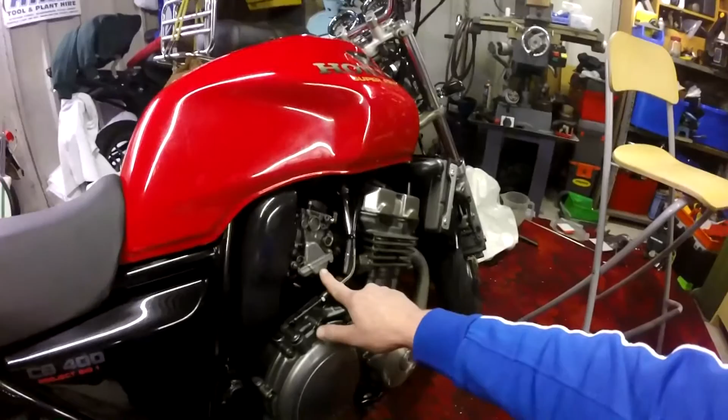Now the first quick fix we can do is as simple as banging on the carburetor. Now what happens is you've got rust and dirt in the fuel, rust from the inside of the tank. It's gone through the fuel line into the fuel bowl and it's got lodged between the shut-off valve and its seat.

Now with the fuel turned off, with something as simple as a plastic or a wooden screwdriver, you can hit the fuel bowl area like that. Nothing harder, and certainly not use a hammer. And sometimes that's enough just to dislodge that bit of grit to make it go through the system, and the shut-off valve will seat and stop any further leaks.

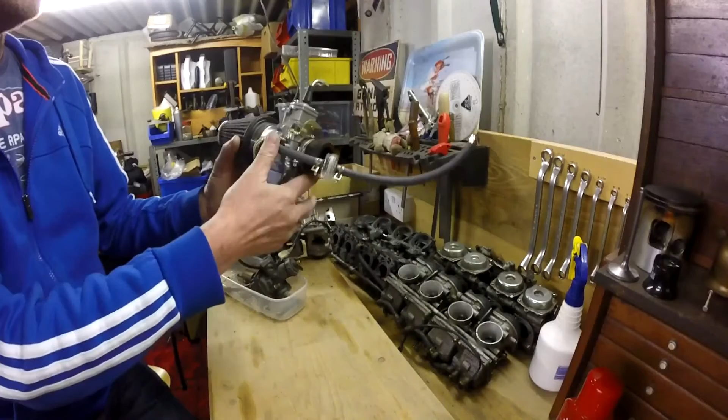So this is a carburetor off a single cylinder engine. Let's just take this off a minute. So we check it visually all around. Is it cracked, broken, any damage? Is everything working as it should do? We check the fuel lines. Are they in good condition? Are they split, perished? Same with the fuel filter, which you should always have.

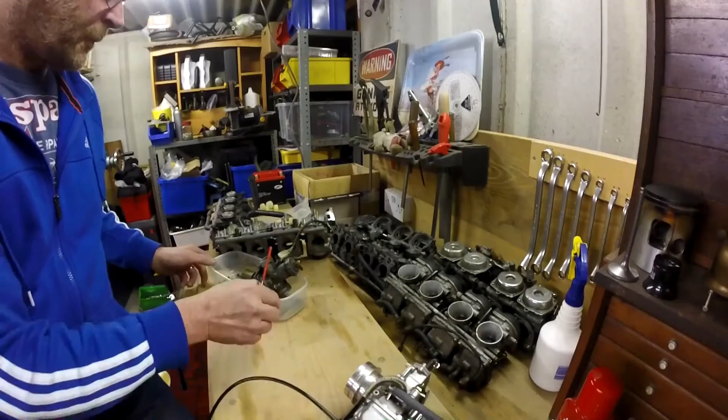Is the float bowl good and tight? The jet retainer, is that tight? Is this gasket for the float bowl in good condition? So then we look inside. Got another carburetor here for that. So we take the float bowl off. There's a gasket that needs to be checked.

Now, one of the main causes for leaking is these floats inside the bowl. Now, has it been punctured? Is it sticking? Does it move freely? And the way it works is like that. Obviously the bowl comes off.

So fuel comes in this line here, comes down here and fills this chamber, and would normally get sucked up the jets, etc. But this is the way in. That comes through this float valve here, and as these floats go up and down with the amount of fuel in, when they reach a certain height, the valve in there is supposed to shut off the fuel. Now that's the main place where dirt and debris get trapped, and that causes a leak.

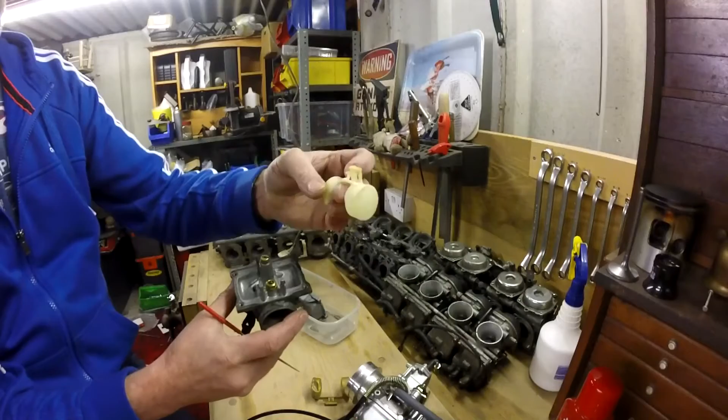Or these floats have been punctured or got a hole in, let fuel inside there, so they give a wrong reading, so they go to the wrong height, which doesn't shut off the fuel. So inside there we take the pin out. The floats are either brass or sometimes plastic, and even the plastic ones can get a hole in. So this float going up or down is what shuts off the fuel.

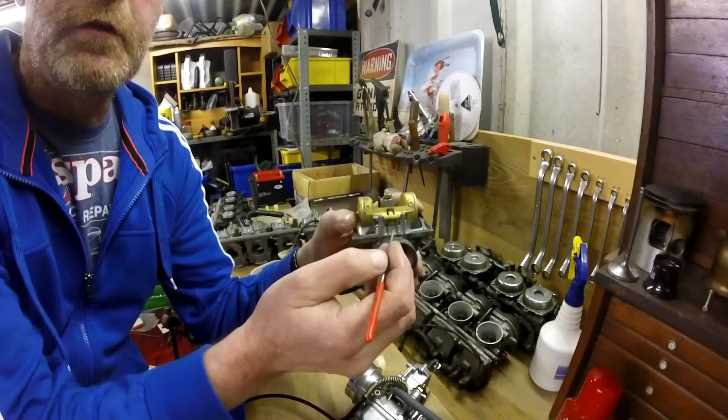Now if I take away the float, the fuel valve consists of two parts. Now most carburettors you can unscrew the whole assembly like that. And what it consists of is a plain bore brass plug with a smaller hole in the bottom, and a plunger that's got usually 4 sides relieved for the fuel to go past.

But its main function is this cone on the end. Now when that's pressed down by the float, there's a little spring loaded plunger there. But when the tab on the float presses it down, that's enough to shut off that valve and stop the fuel passing through this little hole.

Now sometimes the little tab on the float is what's the problem. Now this one isn't bendable, so you can't adjust those, not without heating it up and forcing it in some way. But a lot of them have a little tab, and the idea is that with a pair of pliers you can gently tweak that little brass tab so that when those floats go up and down, it shuts off the fuel.

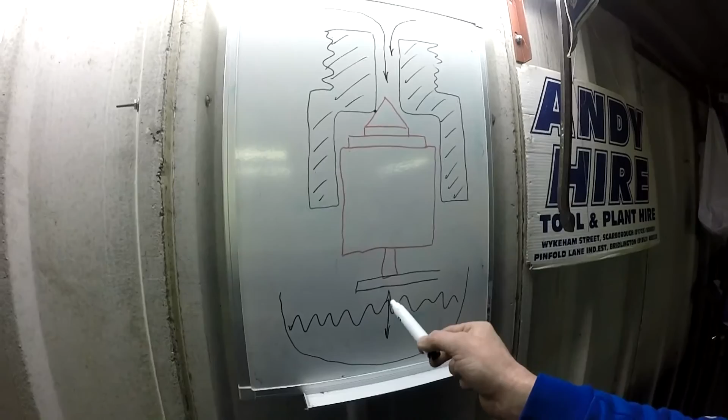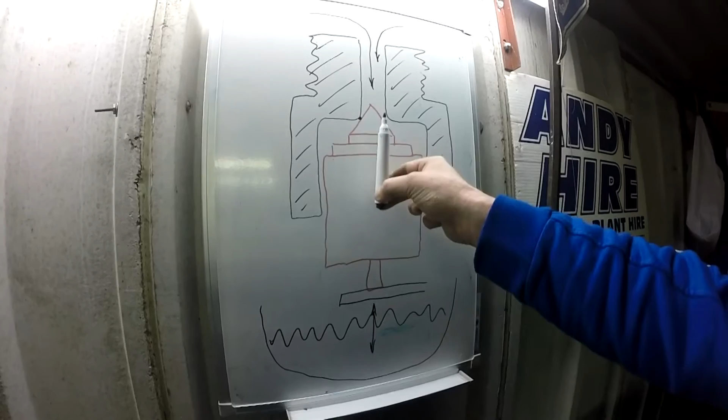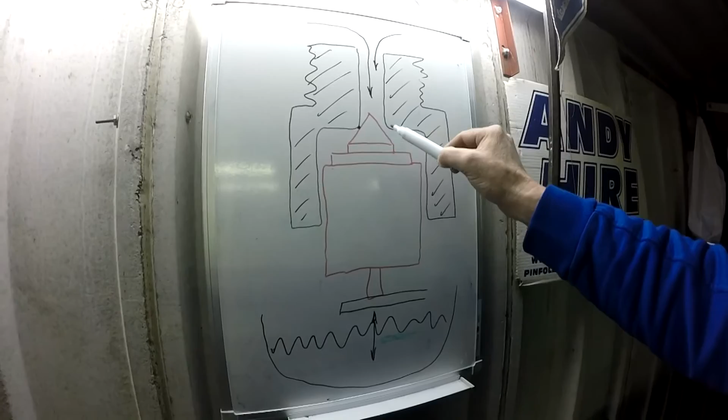So this is a quick doodle of what the valve looks like. This is the brass valve here, this is the plunger with the cone, there's your tab pressing the plunger up and down, this is your float bowl, there's the fuel. So as the fuel goes up, it pushes the plunger up. Now if there's a piece of debris, grit, whatever, this cone won't block off this aperture here, and the fuel will just constantly run.

Another important component to check is the top diaphragm, if they're CV carburettors, because they're reliant on a vacuum being created in the top chamber. So you have to check that this diaphragm has got no splits or tears in it.

Now you can just gently ease it away from the slide. Don't be yanking at it, you know, it's not your wife's knicker gusset. Just enough to make sure that it's not got a rip in it. See, this one has got a rip. I don't know whether you can see that, and that ain't gonna work.

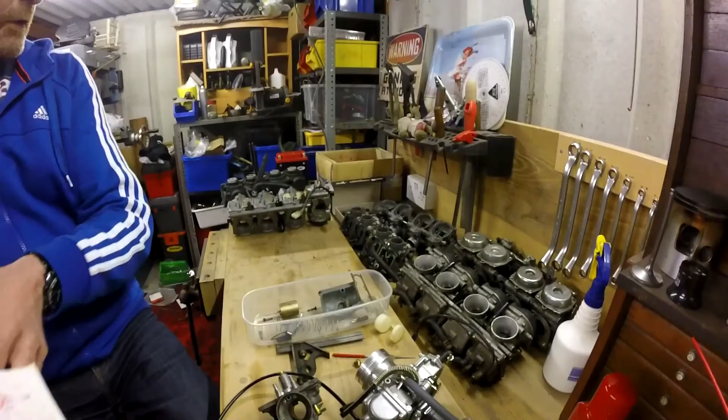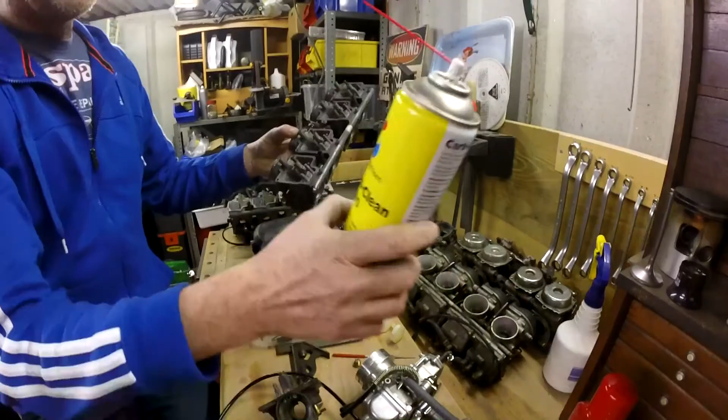Right, so getting back to the problem I had with my carburettors, I cleaned my carbs with the likes of carburettor cleaner, you know, and all the jets, ports, etc. Blew them all out with an airline. Replaced all the seals and gaskets. I even invested in an ultrasonic cleaning tank. It's only cheap and nasty from Aldi or Lidl.

It's supposed to be for your jewellery or your spectacles, but I put all my carburettor parts, jets, valves, needles, etc. in there. Bit of cleaning solution. Switch it on, let it buzz away for 5 minutes. Does the job, great. So yeah, I did all that, put the carbs back together very carefully, put them back on the bike, and the bloody fuel leaked again.

Took them all off, took it apart, cleaned it, put it back, and it still leaked. So again, I took it all apart and investigated each carburettor individually, and it turned out number one was leaking, and it turned out to be this little float valve.

So I only discovered that this valve was leaking because I used a jeweller's loupe, jeweller's eyeglass, some extra light, and looked at every single part, and I noticed that one of the valves had marks on it, as though someone had put a piece of wire or a needle or something down this valve, and he must have scratched it or marked it.

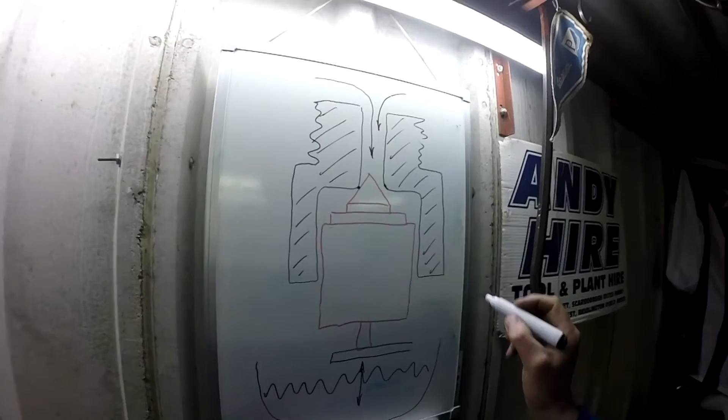And it turns out that this little plunger wasn't sealing the valve, and it was leaking past on the scratch. It was the tiniest of scratches, but it was enough to make the fuel leak. So this scratch was on the corner of this hole here, and it was stopping this cone from sealing.

So the problem I had with my carburettors was the fact that the valve seat on this bank of carburettors is pressed in. They're not removable. Well, you can, but you can't buy the replacement part. So I needed to recut the seat for this tiny little valve in situ, because I can't replace that. Whereas these smaller carburettors, I can just go and replace that part, but these ones I couldn't. So I needed to devise a way of recutting that seat.

Now that seat is similar to the poppet valve on your cylinder head. You've got a crude cone there in the cylinder head, and this is going up and down. And if that's not sealing, you recut the seat, or you clean it up with a bit of lapping paste. So I needed to do the same with this small valve.

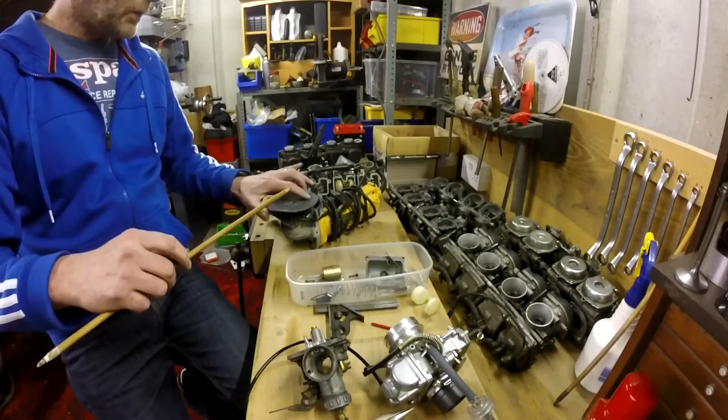So to clean the valve seat, I got a piece of wooden dowel. I used a narrow one, and with this in the vise, I basically just ground that into a nice cylindrical shape on that end. At the other end I did the same with my dowel, and on this end I put a slight cone. So first of all, let's get rid of that.

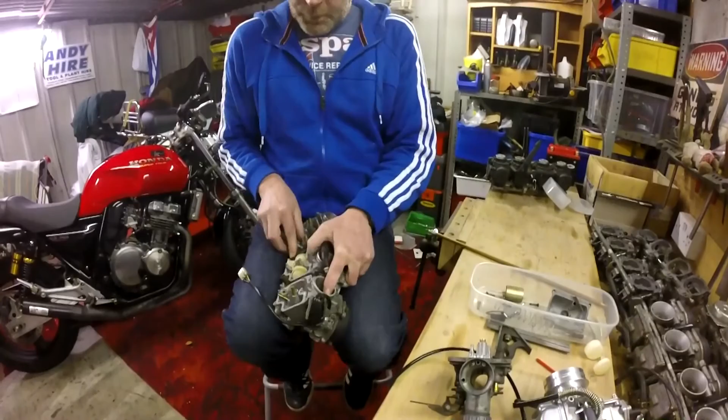As crude as it is, I had to put the carburettors between my knees, but you can put it in the vise or whatever, and I used a bit of T-Cut. Just dip it in and wipe off the excess. You don't want too much on. And I just ground the wood till it's a nice snug fit.

And with just a few rotations you clean up the walls or the cylinder of the valve seat. And again on the other end with the cone, again a bit of T-Cut down the hole, and just like you're lapping in your valves on your cylinder head, just a few twists, pull it out, then if you can, with a Q-tip or whatever, clean it, have a little look, the scratch is gone; if not, a bit more.

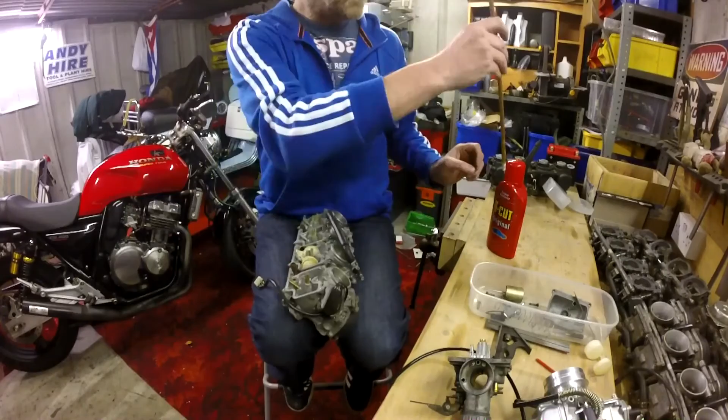And that'll be it. That was purely enough to clean that valve seat, and you could see a nice brass clean ring down in the bottom, so that when the cone of the plunger was down in its seat, it fully blocked off the fuel.

So after all that waffle, all I was trying to get across to you is that I fixed an otherwise unserviceable component with as little as a piece of softwood and a bit of metal polish and a bit of ingenuity. I've stopped these carburettors from leaking.